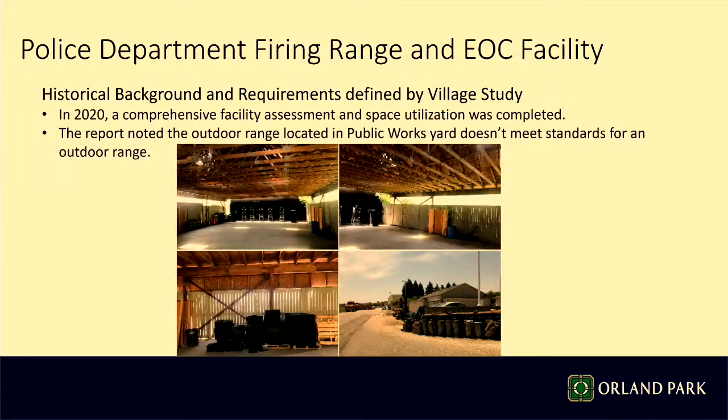A little bit about the background and requirements that generated this project for the village. In 2020, a comprehensive study was done for all of our facilities. We looked at some that are getting a little old in age, where people will work, or what the sizes are. One area we identified was the current range, which is in the Public Works site of the village. It's an outdoor range with a covered roof, as the pictures show. The report showed that this doesn't meet the standard for an outdoor range.

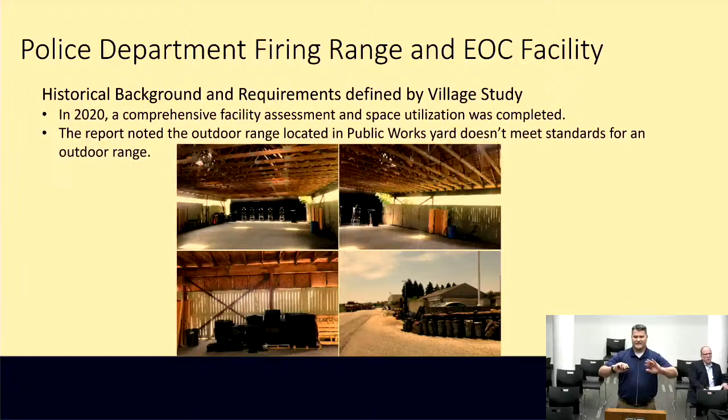So we quickly started to put together proposals from A&Es to look at what we could do to provide an indoor range, because the village doesn't have the space or land for a complete outdoor range due to the impact zones beyond the range. Most ranges have a zone for many, many miles.

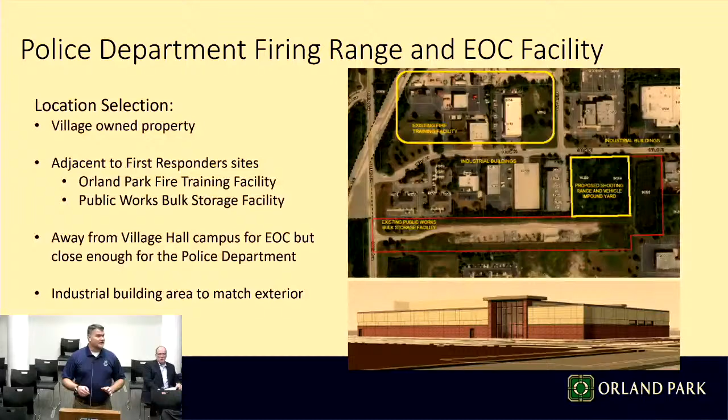You can see an elevation of the building that the A&E's put together. You can see how we have an entry area, but there's very few windows in this building because of the nature of the facility. It's a range and also an EOC center. So we do have a couple of windows, but that's in the training room.

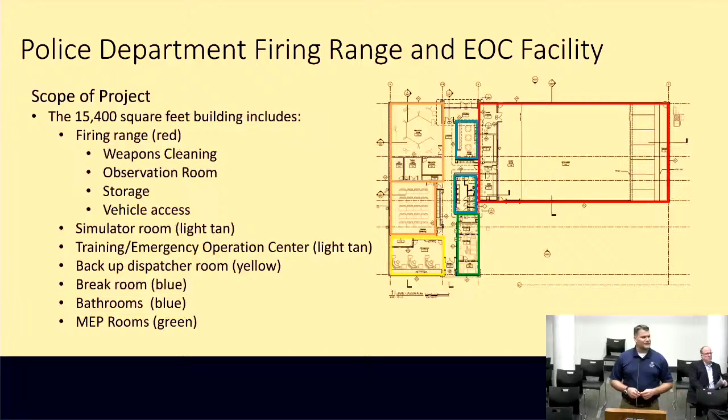Oh, sorry, did I hit everything?

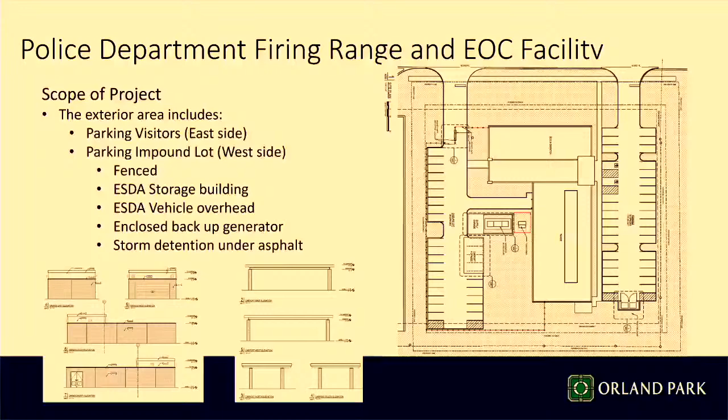The last thing—there's also some storm detention on the west side. The pond that was in that first image is kind of a mirage; all the water flows away from the building, it doesn't go to that pond. It actually goes to a pond up just north, about 1.5 blocks away. We were trying to get it to flow to that same pond, but it doesn't work with the slope, so it has to go there instead. So we have some underground storage detention.

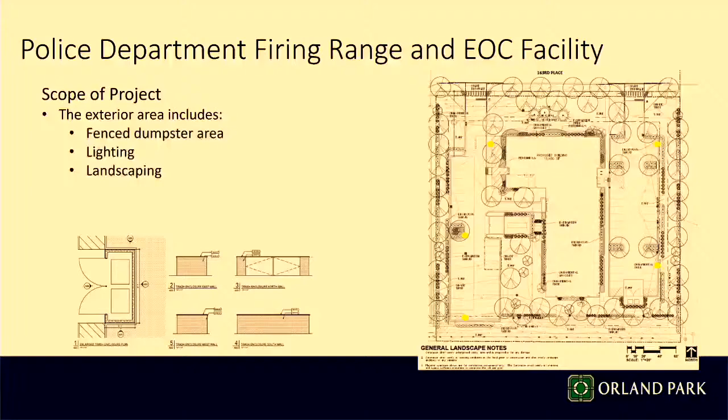The exterior also includes the dumpster I mentioned. You can see the yellow area for some lights, but the building has some lights on the exterior as well, and obviously landscaping around the building. We showed you a couple of the enclosures, like the dumpster area there, so you can see that as well.

That kind of concludes it. We made a model, so you're more than welcome to, if the roofs pop off, to see it 3D a little bit. Ignore the colors, because that's not how it will look, not that colorful. But my kids only have so many colors for me to make that model.

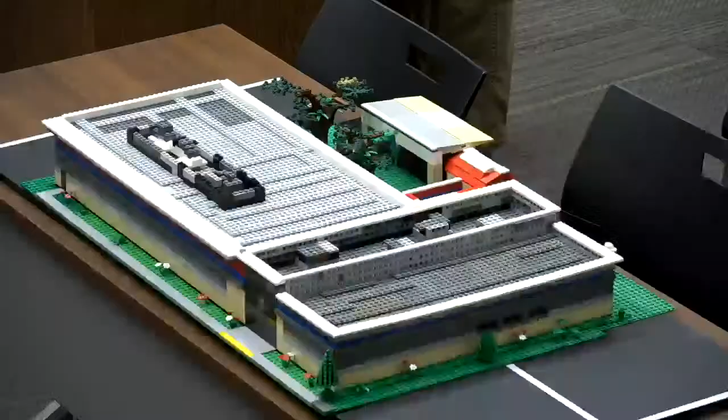Your kids did a great job on that model. I was down there looking at it, and I would encourage all my fellow commissioners to go down there. You get a real idea, other than the picture, a real scale model of it, really impressive, gives you an idea what's going on. I just think you did a great job on that.

We're welcome to take any questions that you guys have. Well, we want to hear from staff. That's true, that's right, you have to do yours.

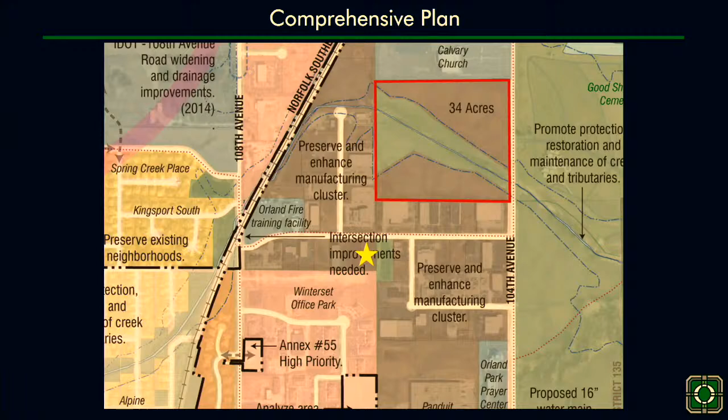The site is zoned manufacturing, and governmental uses are a permitted use in that zone. The firing range fits in well with the surrounding context due to there being an OFPD training facility and maintenance facilities right in the area, so the surrounding context just makes sense.

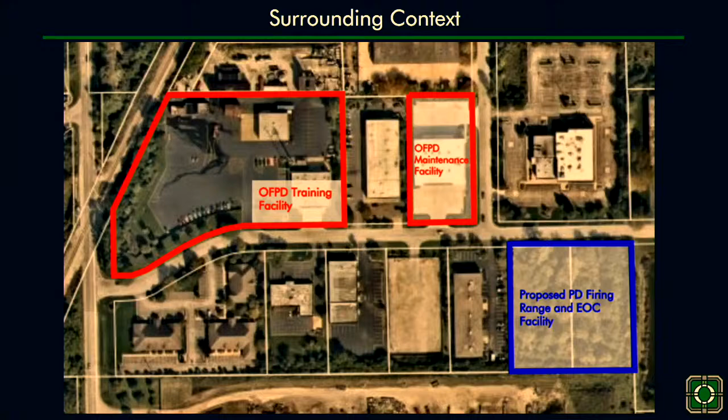The petitioner is seeking to consolidate lots 26 and 27 in phase 3 of the Bemsterboer Industrial Park. This is not a public hearing because non-residential lot consolidations do not require a public hearing according to our land development code. The manufacturing district requires a minimum lot area of 20,000 square feet for these uses, and this well exceeds that requirement, so we recommend approval of that plat of consolidation.

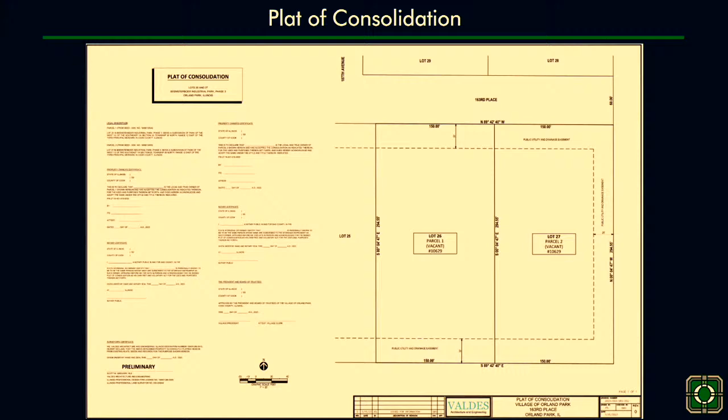Going into the site plan, the firing range and EOC is located on a 2-acre site and has 2 curb cuts onto 163rd Place. The east curb cut will be used to access the main building and is the public entrance of the facility, and the west curb cut will be used to enter the vehicle seizure lot. It is gated, and tow trucks and police can enter and leave through that gate, with access only permitted with police officer credentials.

Governmental uses are required to provide parking at a rate of 1 per 500 square feet of space. This requirement has been met because the vehicle seizure lot would not count towards the parking requirement, as it is outdoor storage and the users of the lot are not the ones using the building.

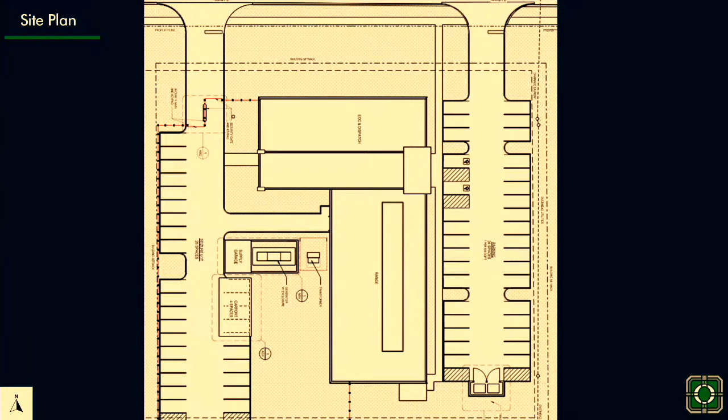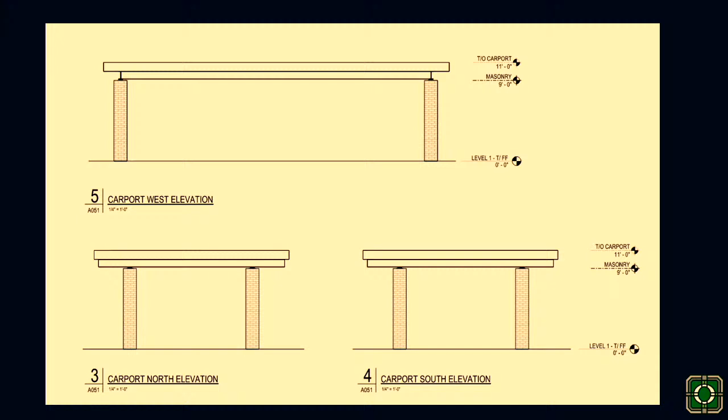As Joel mentioned, there are some accessory structures on the site which have been designed to match the main building, including a carport, a supply shed, a generator room, and a trash enclosure. All these items meet the code requirements for accessory structures. The carport is located in the gated lot and contains masonry pillars that match the main building. The supply garage is also on the west side of the building and shares the same exterior materials, as does the generator room, which is connected to that supply garage.

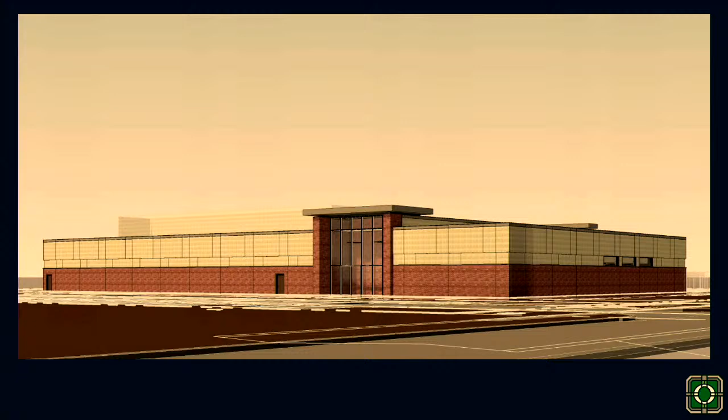Going into the building elevations, the proposed building exterior is a combination of precast concrete with a brick face and an acid wash panel finish. There is a screening wall at the top of the building, which maxes out the height at 27 feet and 4 inches, meeting our code requirement for the manufacturing district.

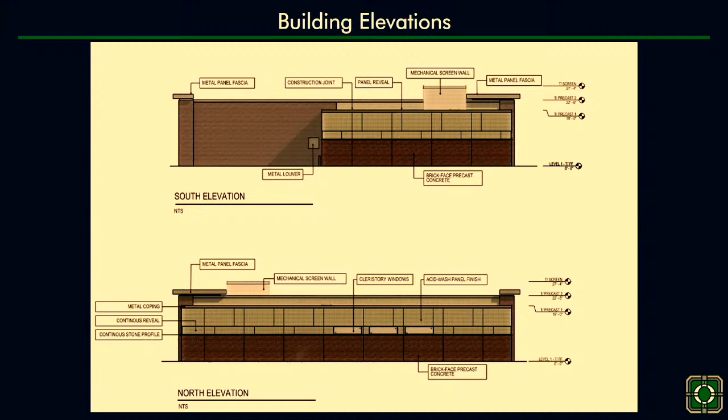One thing to note about the windows: non-commercial uses do not have a window or transparency requirement, as we've seen in other industrial developments throughout town. The overall design meets the standards outlined in the design standards of the Land Development Code. Here are some additional pictures of the elevations.

The preliminary landscaping has been approved by staff for this petition. One item was forgotten during the preliminary approval, which was one of the landscape islands. Just one additional landscape island tree needs to be added to that double-sized landscape island on the west side of the site in the vehicle seizure lot, and we added that as a condition of approval.

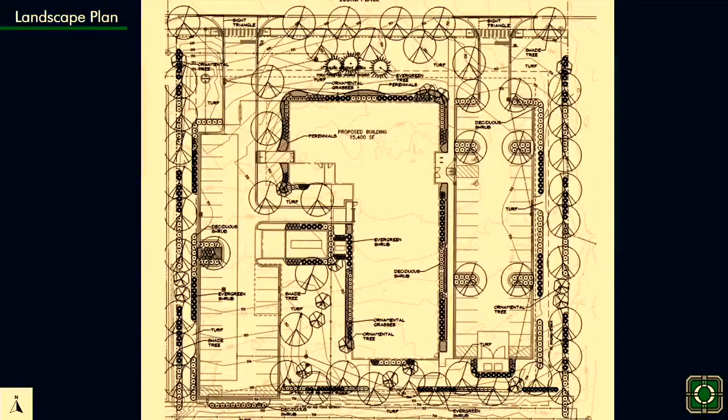Going into the staff recommended action, staff recommends that the Plan Commission approve the site plan, landscape plan, engineering, and building elevations prepared by Valdez Architecture and Engineering, last revised December 1st, subject to our standard conditions, except for the one item to include one additional parking lot landscape island tree within the site, just to meet the minimum code requirements.

Staff also recommends that the Plan Commission approve a preliminary plat of consolidation for lots 26 and 27.

The staff recommended motion is regarding case number 2023-0508, also known as Police Department Firing Range and EOC Facility. I have moved to approve the staff recommended action as presented to the Plan Commission for this case.

On the recommended action, do we need number 5, regarding the sign? I wasn't aware if there was or was not going to be a sign, but we do put that as a condition of all our approvals, so it could be removed if you'd like. Right now, the police department chief said he doesn't want a sign. It may be something once you get into the lobby, but he just doesn't want to call it out too much. It leaves it out there that you'd need to get a permit if you wanted one, in case you change your mind. And then we'd use our standard sign if so. Most likely it would be that standard sign.

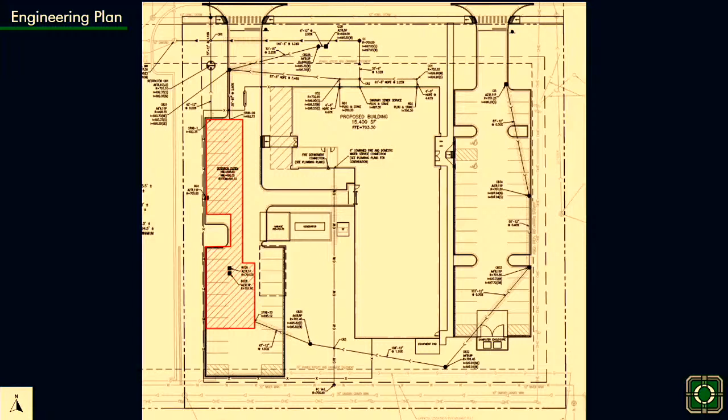Does that mean you can drive a vehicle in that garage door into the range? Yes sir, that's a good question - I didn't highlight that. Through the west side, you'll see right in, north of the generator, that access lane allows the vehicle to go in, and they wanted a dynamic range. So they want vehicles - they do it currently at the Public Works site, but they shoot around a vehicle, they move around a vehicle, they hop out of a vehicle and shoot. That's the kind of dynamic training they're doing, real life training. So a vehicle will be allowed in, and it's shown on the model as well.

Okay, then a couple of questions on sheet A050.

Oh, the carport, I think you answered that. That's so that if they have to get out in a hurry, EOC people don't have to scrape windows and whatever. Yes, sir.

Okay, on the sheet for the middle section where you've got the mechanical room, in the blue area down toward the secure lot, there's two, I don't know if they're columns or whatever. What are those? You may want to go to A050, my presentation. That's just a bump out.

Right here, the security gate? Yeah, so along the hallway to the range there's some lockers so people can change. The bump out is just a studded out area so that the lockers... No, come on up Rowan, that's not what I'm talking about. These things right here, what's that?

Isaac Plum, project architect for Valdez. Those are just structural elements. Those are columns. Columns? Yeah, okay. That you can see on the roof plan.

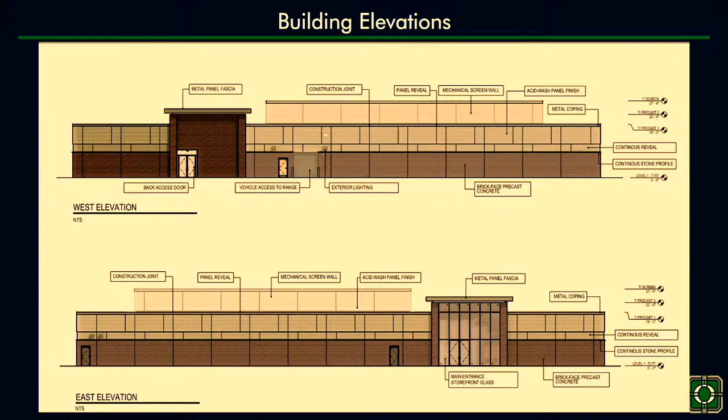What about communications for the EOC? Yes, I think there's fiber optic now that runs between the present EOC, the village hall, and the police department. Correct. What about communications down to this building, which is quite a way south? Yes, we're working through with IT department. Our director, Tad, has reached out. We're actually putting an RFP on the street here in January.

For fiber optic. We have conduit from Costco pretty much all the way down to the Sportsplex on the south side of 159th Street. So we're going to run our cable in that conduit, which has no wire currently, down to 108th, 104th.

Okay, then a couple of questions for staff over there. In the title and the summary on the staff report, you talk about police department, firing range, and EOC. A lot of people might not know what EOC means, and I think you made reference to it once tonight. It's Emergency Operations Center. Yes. So I think it'd be a good idea if you say that and put in parentheses EOC, and then the rest of the way down you can just say EOC, and somebody can refer back up and know what EOC is.